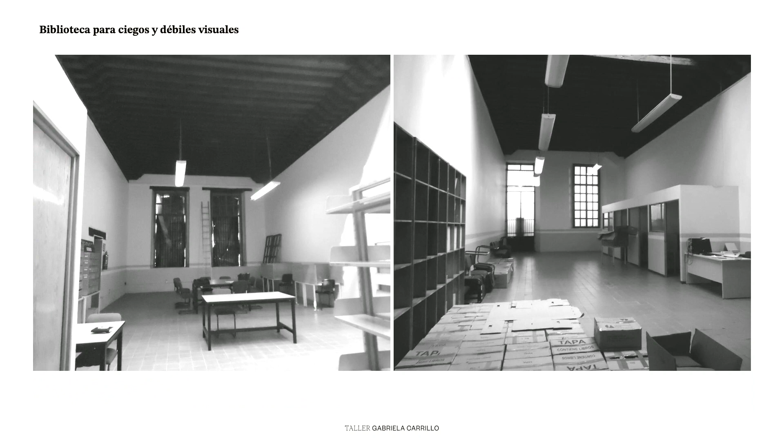I don't know in your case, but in mine, I never had in my mind the idea to design for people that can see. And that was really tough, to start to see that I used to design for myself. I used to see always from my point of view. So at this point, I visited the place. The library was already there. The building was an old one. It had many phases along the years of this building. Very beautiful.

The size of these spaces, the height, wooden beams. I love to be respectful with the memory, but in this case, the library for blind people was like that. The program they asked for us was very similar.

Something that started with thinking: okay, I need to start recognizing otherness. And that changed, I think, my whole life, because suddenly I wanted to start asking what happens with the rest of the senses.

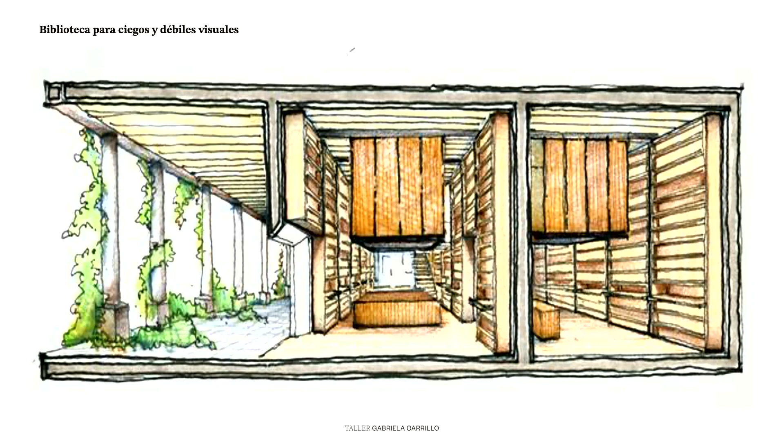With smell, with the aromas, with the echoes, with the sound. So the strategy was to create a vestibule that was an aromas garden, which we designed with an artist. Then we created two boxes that move around the sound and the echoes. That garden was a composition itself, having to do with the aromas of rosemary or lemon, and it was a provocation for people to get inside.

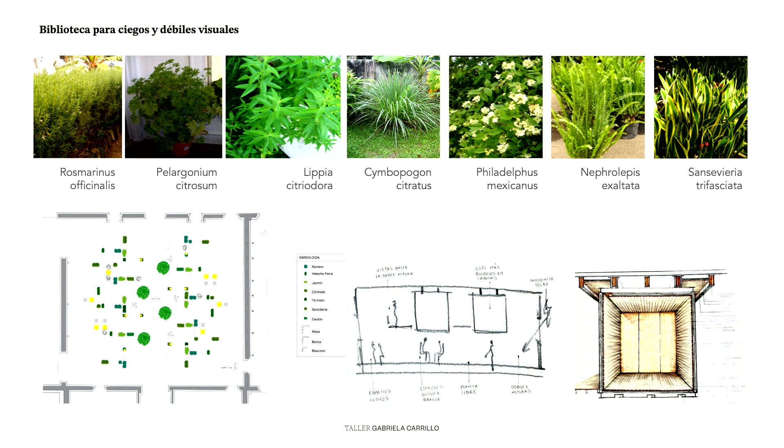Then we started to think about the echoes and how space can create this impact. We usually forget it, and it's ridiculous. So for us, the provocation of creating these echoes and silence at the same time was a big opportunity.

We wanted — in Mexico there are a lot of seeing impaired because of illnesses, since people don't have money to treat them. So they start to lose their vision, and yellow is the best color to be seen.

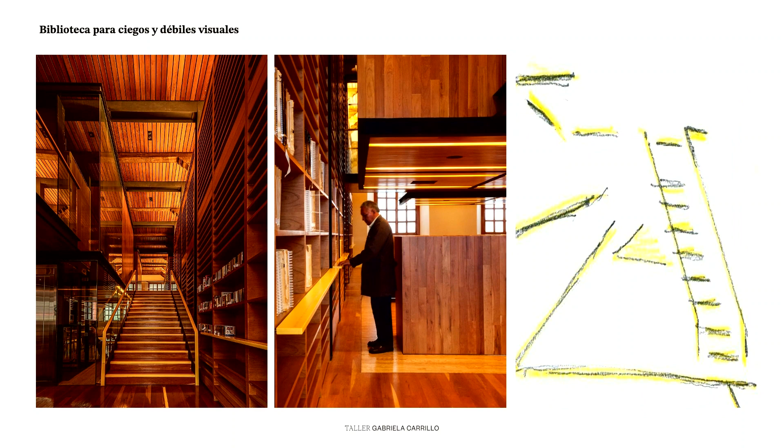So then yellow became an echo in the lights, in the lines, in the handrails, but also we wanted it to work as an acoustical box of wood, with different tones of wood, to help find out the space where you were. We worked all the time with sounds.

And we found out that the program should create a futurist library that thinks in a space where sounds could be achieved. So it was the first time I designed a plan with echoes and sounds.

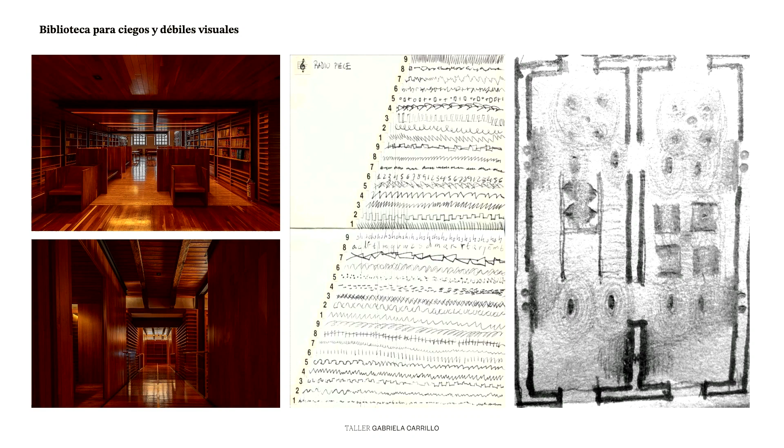It's a soundscape where speakers — mono speakers, general speakers — happen in this. We wanted to create a clear space, just with volumes floating, that could wrap all the sounds in one space.

We found out that the library for blind people is very noisy. There are kids. In Mexico, blind people unfortunately are a group not well recognized. Imagine kids who are blind.

So this gave me the opportunity to ask myself more questions in the future, to find out that I want to design from another point of view, to feel uncomfortable all the time because of the things I found out in terms of gender, in terms of social conditions.

And at the end, we managed to create, in this case, soundscapes — there are art pieces, sound art pieces happening in the library. The furniture was designed especially for that. And it's, at the end, a labyrinth of sounds in a very clear space, floating there.

The second project has to do with some judicial courts. For me, it was a great opportunity to start working with — asking myself what justice means, and if we as architects could do something with that.

So we were hired by the municipality in Michoacán. This town is a very complex town in terms of violence — the worst drug dealing guys are there, and these were the judicial courts.

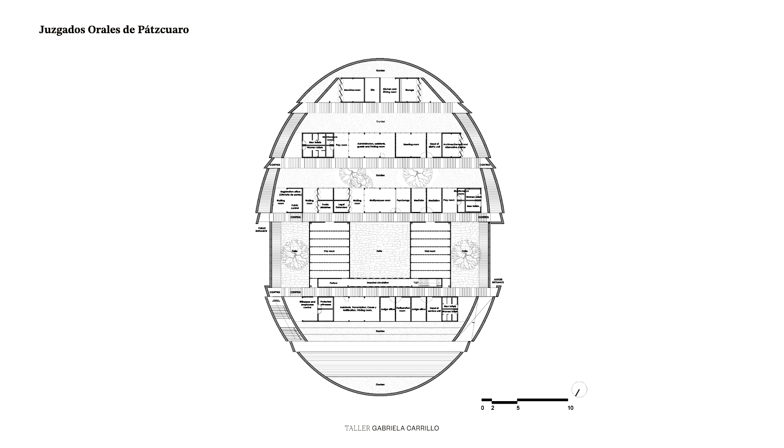The first question was: can architecture provoke liberty? Is there any opportunity that all the different floors can happen in a very free way? Because all of them are filled with bars, even though these are not spaces like prisons — it's like an earlier stage. So the whole composition of the space has to do with an echo to the context.

At the same time, taking advantage of the labor work that we had with stone — this is a public building, and it's ridiculous, but in that place there are the best workers to do this stone work. And then we took advantage of the topography just to create the jails area with a higher wall, and then the other ones more clear.

And then again, ask ourselves: how can democracy be expressed? At the beginning, a lot of people thought this was like some kind of museum. In their minds, this wasn't significant as a judicial court building. And for us, the idea of keeping this transparency was important.

When I started to move around all the judicial courts in the country, the format was traditional - everything written, there's never someone facing the other. And it was ridiculous to see the judge with a big office, even with a jacuzzi and a pole dance element in their own office.

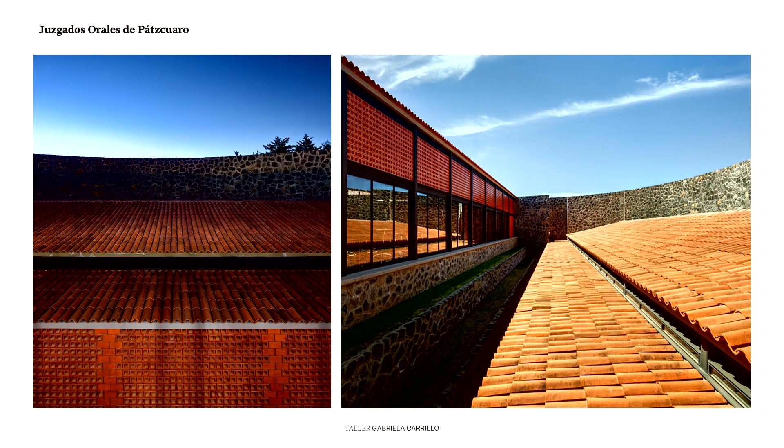And that's a big question: how architecture could create this transparency, could create topography, could create intimacy, and another opportunity to create a landscape as well. So at the end, we managed to take away all the bars to create an articulation.

I always say that the building is an articulation of a complex program, where judges, where guilty or not yet guilty people is, and where other people happens, and how with that light can be something that happens again with very local materials - in this case the brick - taking advantage of the voidness and taking advantage of the mass at the same time.

The next project has to do with time, because I've been working on this project almost 15 years. It's really crazy. It's a very big project, and it's very near here - an hour away from Tijuana in Ensenada.

Ensenada has become a great place for drinking wine. I hope you have been there - great restaurants, great food, great wine.

So this place is a huge spot. It is a territory of 800 acres. It is very beautiful because the vineyards are beside the amazing mountains and the sea. And what they asked us to start working on was a winery.

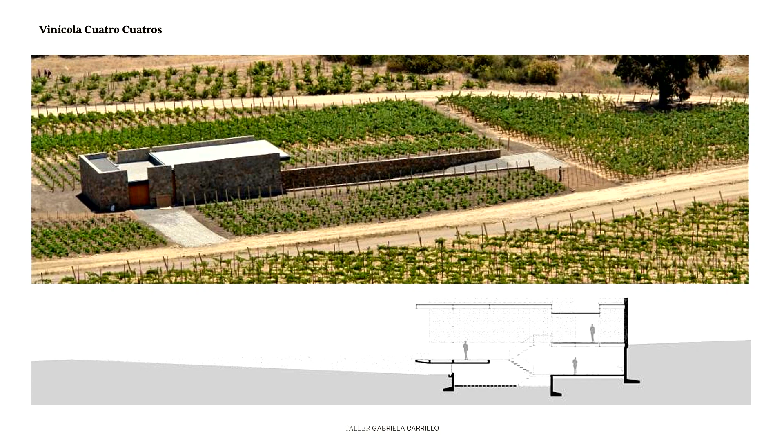And then a lot of things started to happen because this winery was really small in the middle of all these vineyards. And the idea was how we can create a dialogue with the landscape, because we didn't want to do anything - we wanted to dissolve ourselves, to disappear the program, the scale of the building.

And then again, taking advantage of what we had learned, we created a topography that took advantage of some olive trees that were there. We understood the climate. And this is very particular - in Mexico we had a whole diversity of climates, as you have here in the United States.

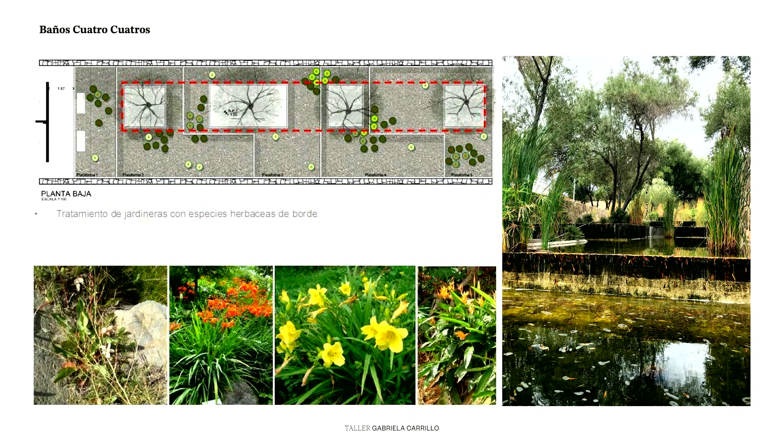And in this case, we found this very desertic climate, and we wanted to create a different kind of atmosphere, a different kind of pool, a place to enjoy, a place that could bring birds and frogs. So we added this pool program to a bathroom program.

These were some bathrooms because the Vinícola became a place for parties, for weddings. It's a multi-purpose building now. And then they needed bathrooms, restrooms, you know.

So what we created was this pavilion, taking advantage again of the stone, of the wood, and trying to dissolve again the different levels, the topography, and the facade to become a water garden.

And always the question when we develop hotels is to ask: how do we live? How do we inhabit? What do we accept? What is the connection? Where's the luxuries?

And in this case, to think this idea of - for me, this is, I mean, you have in this territory the most amazing sky, maybe not here because of the lights of the city, but it's the same territory and the stars, and without this rain happening - in Mexico, we have rain nine months every... well, it rains often.

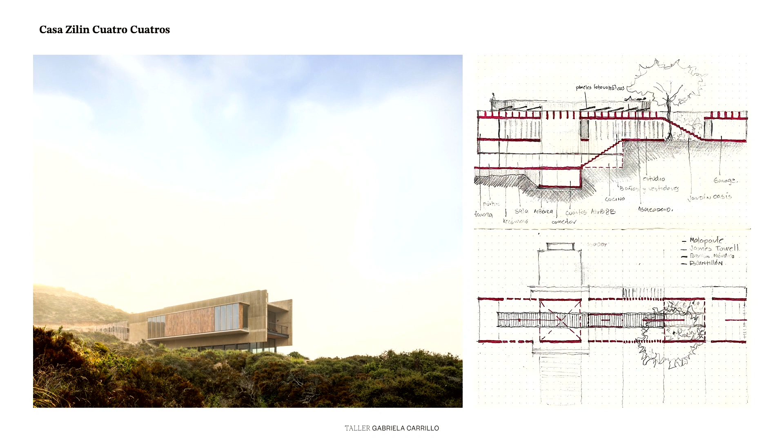And there I had the opportunity, as I mentioned, to keep working. So I had developed a house, which is, at the same time, where there's a beautiful fog happening in this place. And this knowledge had happened over time - understanding that the wind becomes an enemy, like knives in your face, that the fog happens every morning, that the wind is terrible.

So being beside a mountain, it's healthy - you can take advantage of the topography to create an experience of how the light moves around.

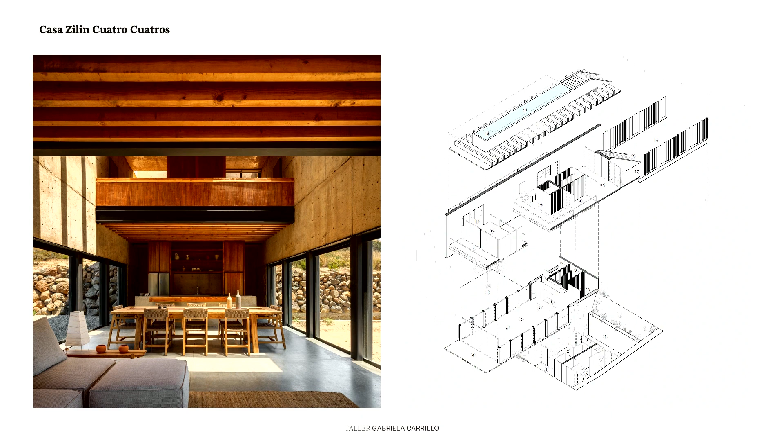This also makes me understand a bit the scale of things. I had never worked in a territory this big. So how to place elements and create this connection with the sun and the stars and with all the materials - in this case, the stones going underground, stopping the wind, and taking advantage of this amazing and very respectful landscape. I think the idea to dissolve the architecture and consider the complexity for this landscape to grow in these desertic conditions was one of the main issues for me to understand.

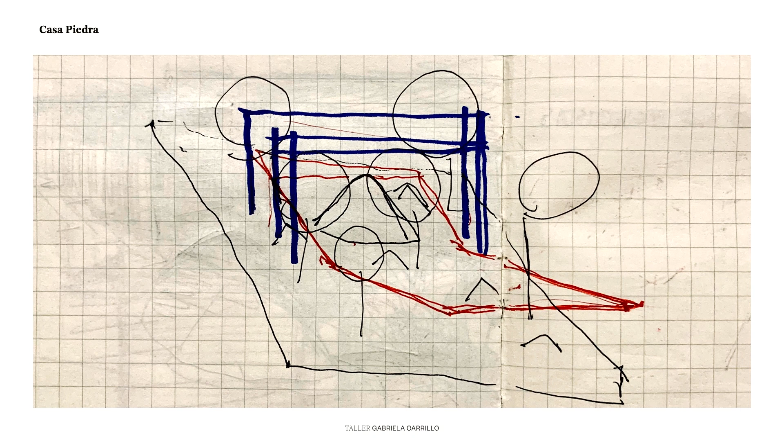Taking advantage of the presentation and talking about stones, this is a house I designed for my father and my brother. My father has been living in Acapulco for 25 years. Acapulco is one of the most beautiful spots, with beautiful bays, and it was really famous. Today we had a big hurricane that destroyed all of Acapulco, so there's a lot to be done in the future in that town.

What happened is my father bought a plot here which had a big rock in the middle. Then I discovered it had two rocks. My father is a geologist, and he wanted a very traditional house, like a very urban house - which is something that happens with beach houses. People want to replicate the urban house they have, with glass, all with air conditioning. And this spot is really hot - I need to say Acapulco is really hot.

But for me, it's exciting to have the opportunity to grab that stone - and not only that, because all the land was filled with stones. So my first question was - this is my family, and I want to provoke and ask myself, in terms of social issues, in terms of these patriarchal conditions where there's a main room, a boys' room, a girls' room, which I hate - I'm against that. They wanted a big house, all filled with air conditioning.

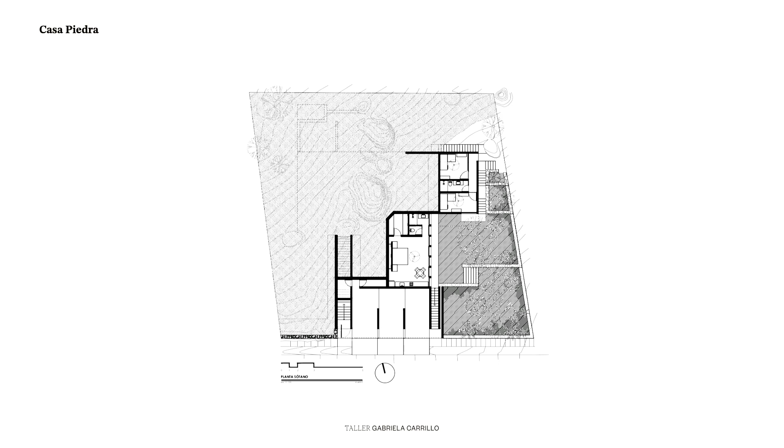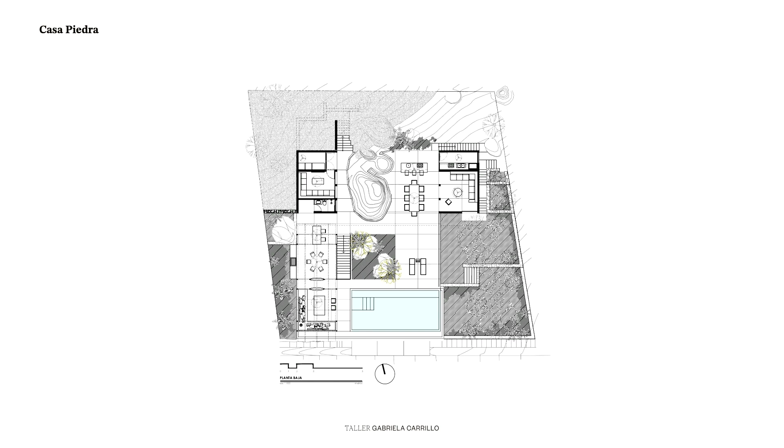The topography was really tough, so I wanted to take advantage of all the different levels I could grab. I wanted to disappear the house, so I imagined the topography becomes a big plaza, and find the level where the wind blows, where the infinity view of the pool happens with the sea, and where the stone grows - was the same level. I needed to walk this plot a lot.

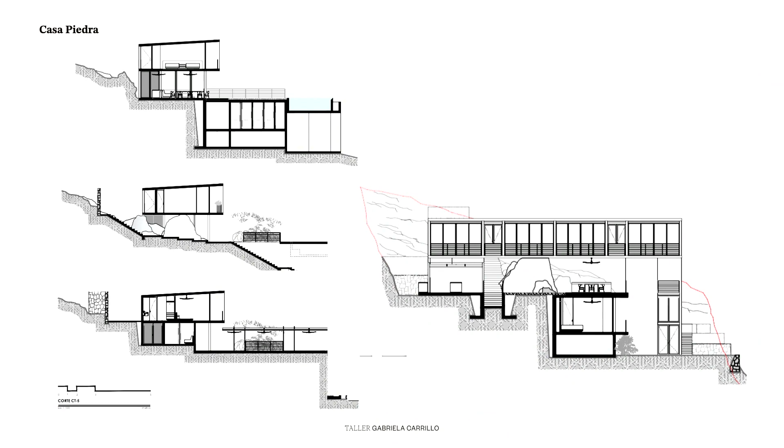And then the other thing was they wanted 4 rooms. So I wanted a portico that could be open back and forth so wind could cross and air conditioning wasn't needed - of course, it needs to happen sometimes. And I wanted also the color of the sand of Acapulco. So I took advantage of one material, trying to scale the house at different levels, taking advantage of the topography, creating that infinite view.

Then ask myself - I want to create something nowadays with all this climate change, all these environmental issues - how to achieve a minimum act that could connect intention, just framing and understanding these main characters, which were the stones for me. And of course, taking advantage of a geologist owner who could accept having this stone left there.

And then managing a bit, taking advantage that I knew my brother was going to pay, I said: if you put glass here you'll need air conditioning, and it's going to be very expensive, so we shouldn't do it. So at the end, the house has just the purpose to create a frame.

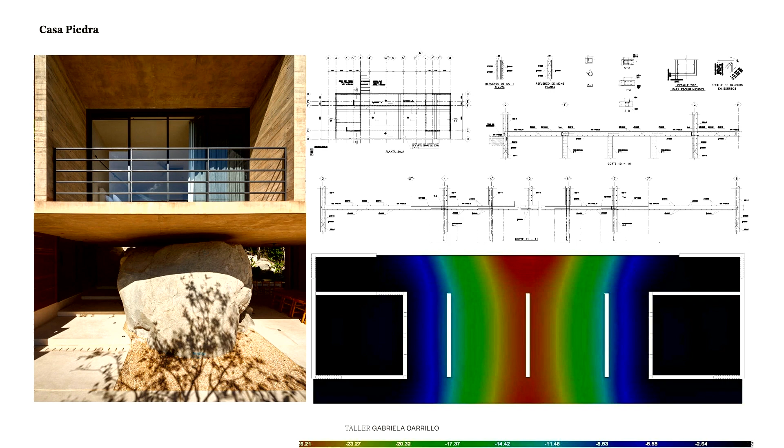That's where I put a lot of energy - how to create that clearance with a very nice slab of concrete, without any beams, without any columns, working with a structural engineer just to understand that the whole building is a big beam, and the division walls from the rooms could become that beam. So the structure became minimal, and the house could float, creating this tension between the organic world of the stones and these perfect, orthogonal lines.

Then crisis happens, and crisis is an important input when you live in a country like mine - we have crises everywhere. We had the big two earthquakes in 2017. A lot of you had done programs here with Carlos Cedillo - he was one of the big leaders in terms of the reconstruction programs we got, because of our relationship with the Secretary of Culture in the area of Morelos, which was the place where the earthquake happened.

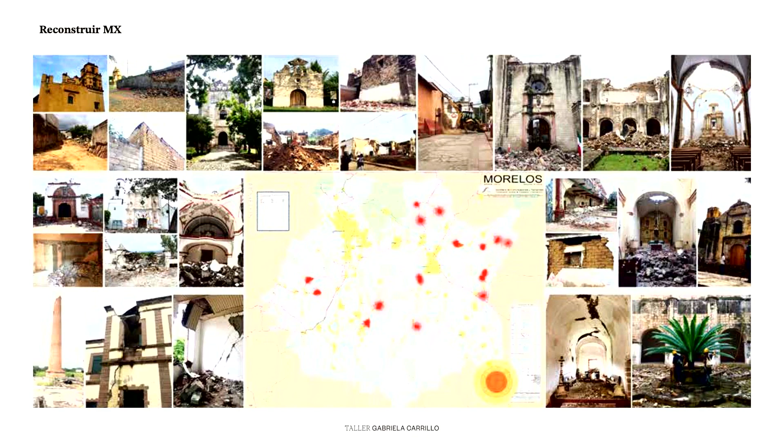All the spots were small towns, very old traditional towns that were damaged because of the earthquake. And I was really involved. I have a kid, an 8-year-old kid. At that point he was like 2 years old. I wanted to ask myself, what should we do as architects? So I wanted to protect the patrimony, which was ridiculous, 80 houses in a town, very beautiful earth-walled houses with big heights.

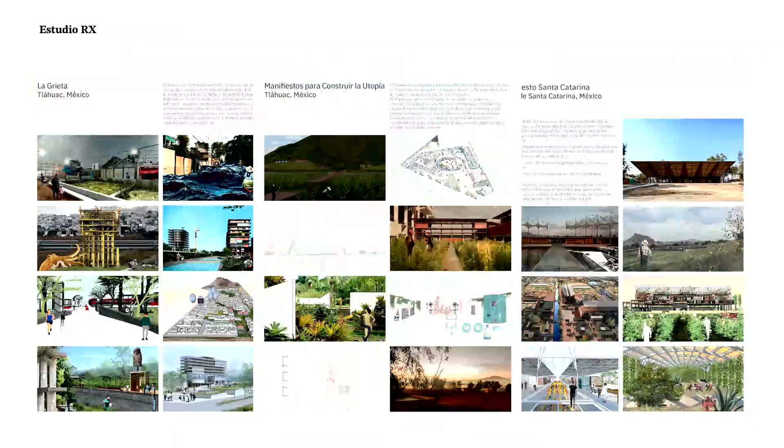And I created, as a teacher in UNAM, as a professor, I created programs, social programs with my students to bring people building with the earth and to work with them. Unfortunately, that program was a failure, I need to say. And failures are opportunities, as I mentioned, because the result is that I didn't get to finish a good project with the community. I was really sad.

I wanted to not do architecture anymore, and what happened is suddenly I didn't want to teach anymore because I thought we have enough energy, you know. We have 7,000 students here and a lot of families, so every student can adopt a family, help them and do work, but that didn't happen.

So then I developed a program which is Estudio RX, this research program seminar that I have with Loreta Castro at UNAM. And the idea is that we as architects can't work with crisis in an emergency, because the emergency is the food, is security, is health. But space needs time. So we started to find out crises, and we found out that cracks were an issue.

And because of the typology of the land where our city is based, we have a lot of problems. Now we're working on migration, which we believe is the biggest phenomenon that we are facing as a world in terms of social and anthropological issues. But well, in this case, we decided to work with cracks.

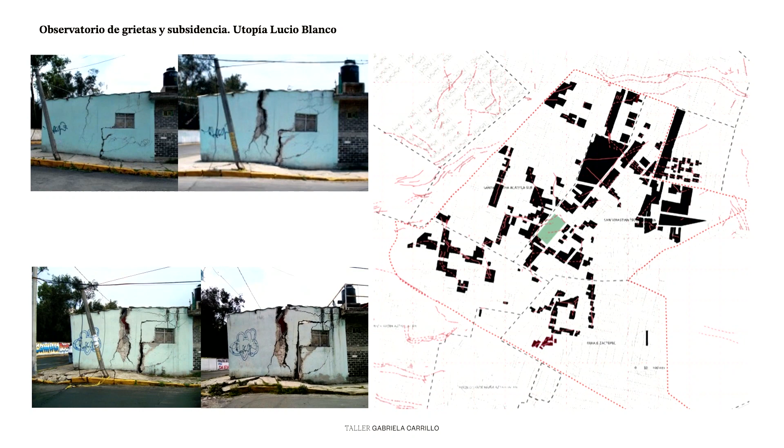Specifically around the lakes, the cracks happen, and there's no coincidence. We had found out that physical cracks are reflected in social cracks, where violence happens, where complex issues in social terms happen. So we started to work in this territory that we found was filled with cracks, and this house had fallen without any earthquake in between. All the black plots on the map were what we call red codes.

So there are spots where no one should build, and everything had happened in informality. We managed to have a relationship with a municipality, a local municipality. This specifically, this municipality has 2 million people. It's the densest area in the city and the poorest as well. So we got a school with 2 cracks happening. We got a lot of rubble, because rubble is like the local material in Iztapalapa, a very strange territory to work in.

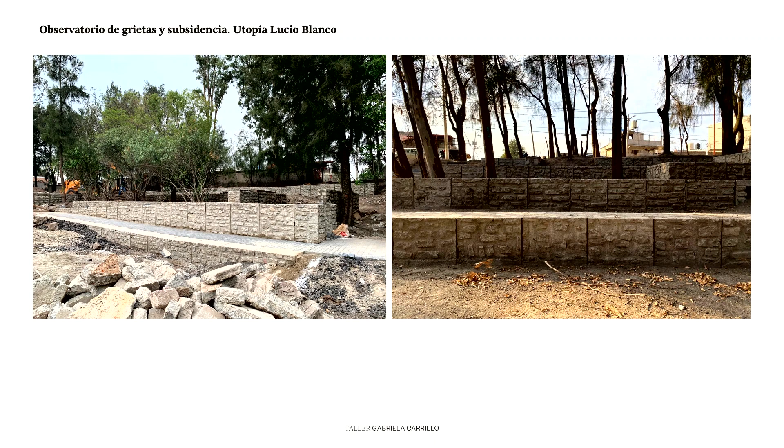So we started to create some lines and to rule the topography with the same rubble, and to create a new topography that could manage different programs like gardening, an outside gym, a playground area, a cultural forum.

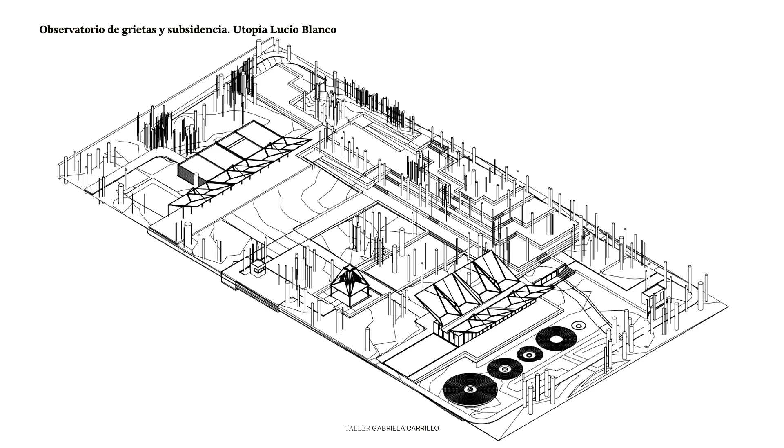So at the end we designed, we worked with the community, with the students. It was a big work asking what they want. They wanted a kiosk, they wanted a place for alcoholism discussion, for violence. It is a very complex site. There are no public spaces here, and the garden became a possible connection for the neighborhood.

And there was also an opportunity to work with a very specific doctor, a geologist, a doctor that studied the cracks.

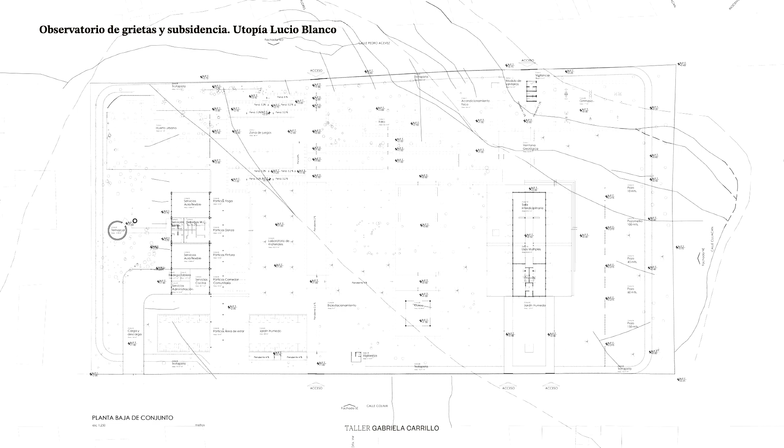And you see all the cracks happening on the territory. So those were the rules where we composed a garden, again, an intelligent garden that considers what type of vegetation. We're really responsible with the type of vegetation that happens. We're very careful nowadays of what is being built, but we ignore the type of landscape we're placing.

And what happens in Iztapalapa is that everyone wants grass. And grass is a big irresponsibility. It needs a lot of water. It needs someone taking care of it. The natural landscape is magueyes, gravel, volcanic stone.

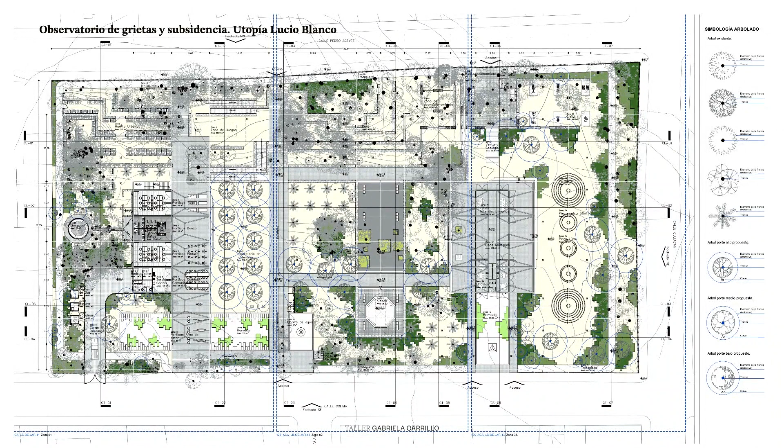So at the end, we created with this doctor an observatory. It's an observatory to talk about subsidence and cracks, because cracks and subsidence are connected. Today we have earthquakes almost every day, and this is because we're draining water from the subsoil. Subsidence is happening because of all these different layers of geology, very different geology.

This has become really violent somehow. So we wanted to explain with a very small, minimum economical building, a kind of machine that could move with the movements of the earth, with the cracks where they are, and create a space of knowledge.

And then we design a garden of benches and of wells - more like wells. The idea is to keep doing these wells for research purposes, so people could find out that this is a garden, another type of garden where these wells are happening this way, and that's beauty as well. But more than beauty, it's intelligence and knowledge of where the houses are.

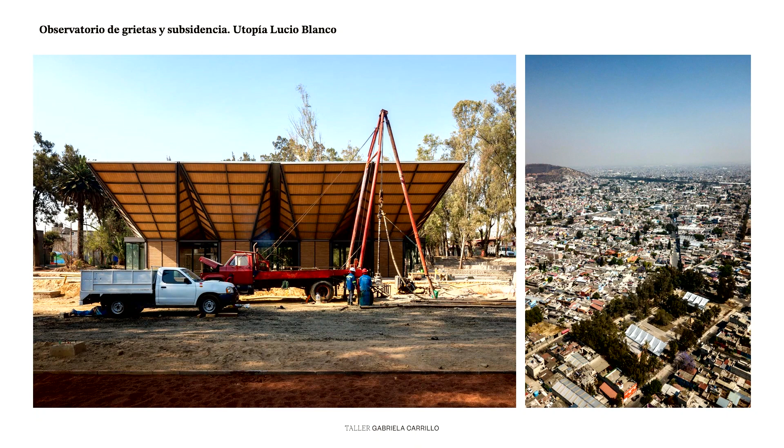In this site, everything is auto-constructed - everyone is building their own foundations. And for us, it was really important to share that.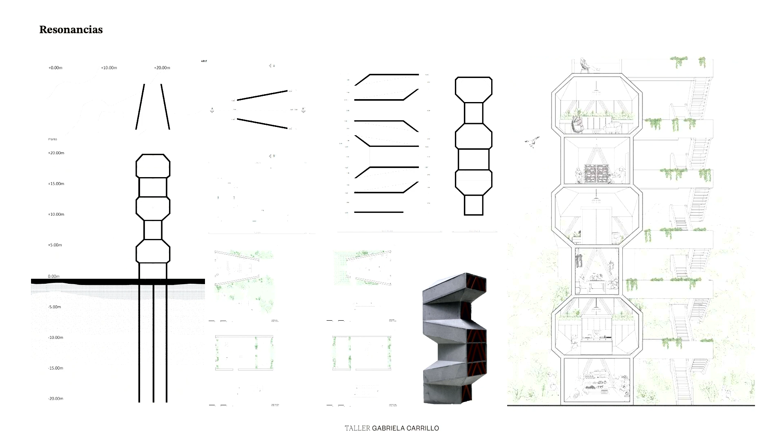So I developed a research, and what happens is that the rules in Mexico make all the structures become bigger, wider, heavier. For me it was just like asking myself, in this program where I got this scholarship, how geometry could become intelligent and done in civil work, and the rest should be prefab. Imagine, we don't have these sophisticated prefab systems - everything is very locally produced.

And then another friend who has worked with communities for a long time during the earthquakes. So at the end, what happened is that in 3 years we had developed 35 projects, built and designed.

In that time, the first proposal was to develop a market. It was not built in 3 months, but it was built in 4, with a budget of more or less $600 per square meter, to develop important different typologies in very different contexts and conditions.

So at the end, we always say we design a strategy. The strategy starts with the group and with the knowledge of the different leaders of the team. Then we design a section that understands the big programs - like multiple purpose rooms, courts, community places to have food - and then the small ones that have restrooms, small workshops.

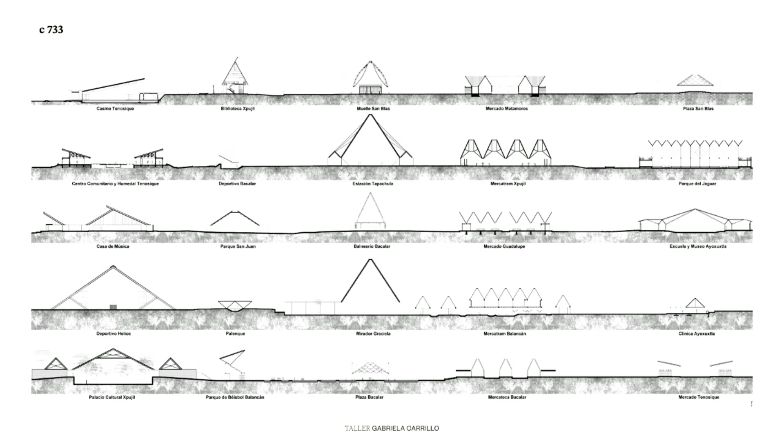We also wanted to design very light structures because of the budget, and to be very intelligent in terms of the geometry again. So triangles are not the goal, and the shape is not the goal - for us it's like common sense. It's the way we account for the sun, the rain. It's the way we take advantage to deal with the conditions of earthquakes or hurricanes.

And well, we started with the competition for the market, and we were inspired - the market is in Matamoros. It's a very horrible area, I need to say - it's like a desert. The plot where we were working was filled with needles, I think, for drugs. There's no public space at all.

And our thoughts were inspired by the traditional Northeast architecture, which was really protecting from the sun, which is very tough. We also wanted our program to harvest, to take advantage. The name of the Colectivo was the code that we placed in the competition.

And we were discussing for these 2 weeks how public architecture should be, because in Mexico we haven't had public architecture for the last 70 years. It's because they pay the constructors to build wherever they want - they don't care about design. So there haven't existed just the big projects.

So in these communities, markets are just like a simple cover made of steel - they don't care about anything. So we thought we'd read from Eladio Dieste, a beautiful phrase that said public architecture should be economical, efficient, logical, but always cosmic. And for us, the cosmic has to do with understanding where you are, like creating this echo and this resonance with the topography, with the climate, with the vegetation, with the wind.

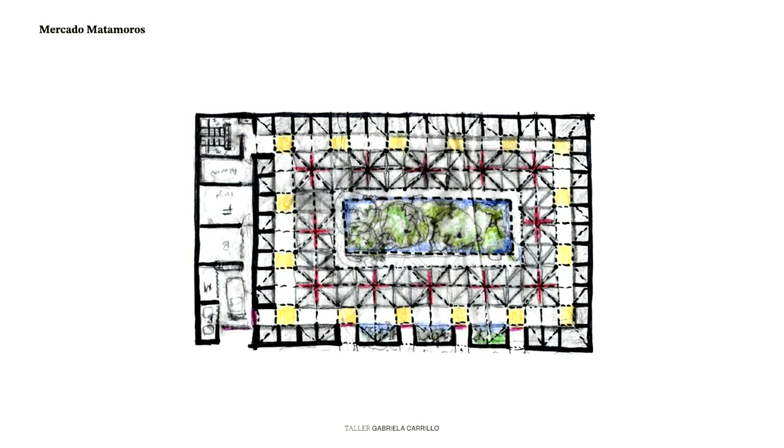And in this case, we wanted to create a protective structure which was done in civil work, and then the prefab, which were these umbrellas in the center, like creating a patio and a portico around an oasis. Of course, that oasis needed to harvest water so we can make it happen and place it with local vegetation.

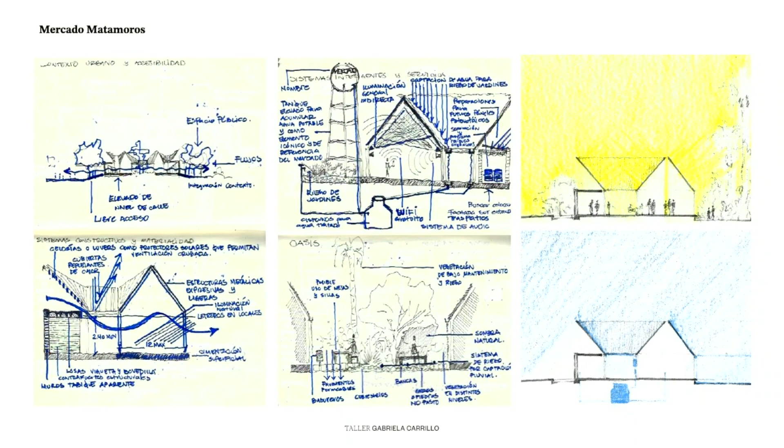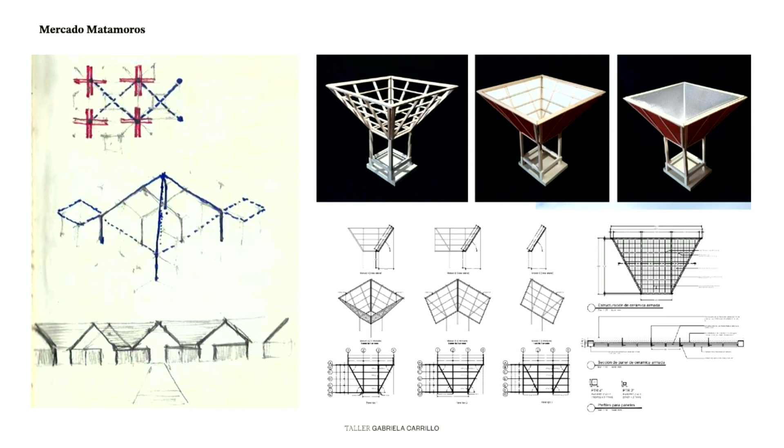So we designed the patios. We were designing the schemes in plan, of course. We were designing environmental strategies for things to happen, like harvest water, without any air conditioning, let the light happen. And then the structural issue, how we were considering, designing, understanding the weight of each umbrella and of each plane, so they could transport these elements to the place already built.

And at the end, this was our proposal. We said, we don't want to reproduce this market, so we're leaving you a strategy. You can change the materials.

We use different layers. In Matamoros, we have production of bricks. So our layer of brick is acoustical, thermical, important for the quality of space. Then we have the steel, which is easy to harvest water and move it clean and send it to the gardens. Then the material has to do with the local condition.

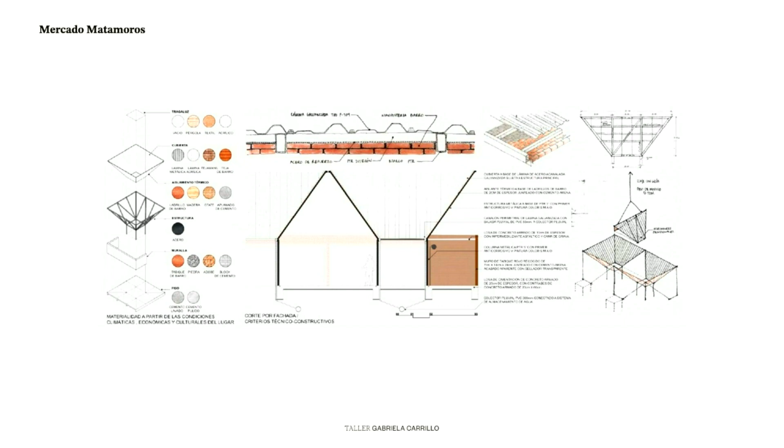Then the walls has to do with the program, and then the prefab element could be a very simple steel geometrical structure that happens, that maybe on its own is very subtle and very thin, but once it gets attached, it becomes a system. And then, of course, in our mind, this should happen all in brick.

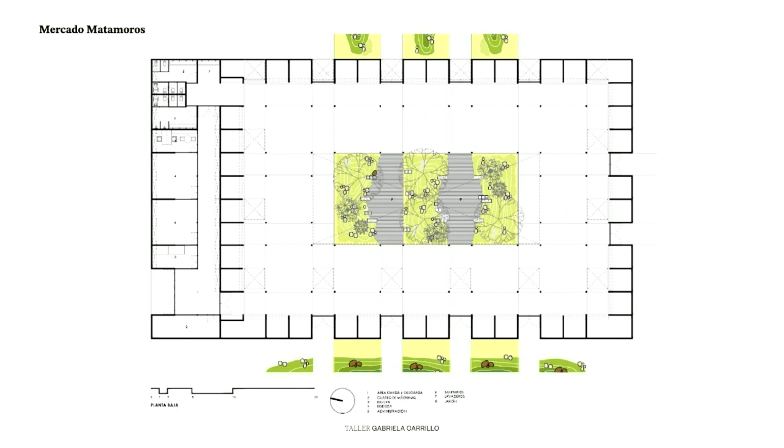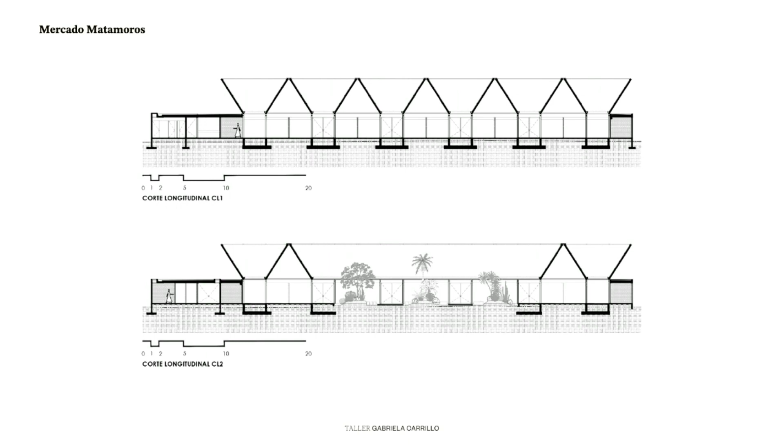And one important idea in this also was to recognize something that happens in my country, which is informality. If you see my streets, if you see everywhere, people go, open their things, they sell everything. There is life.

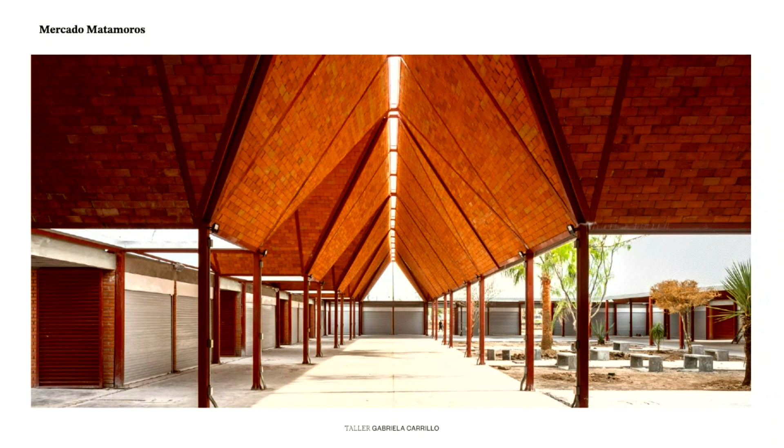So we wanted to create paths everywhere. We wanted the garden to be a place to cross through the neighborhood. And then this flexible space could become anything, because there's anything here. So this place could become a place for classes at night, or a community center, and also, of course, a center for shopping, your groceries, and of course, how to get the light in and these basic elements to happen.

Some months later, with the pandemic, they said, we want you to replicate your market, but now in the southern border. And we were, of course, thinking we are not going to replicate it, but we are going to follow the system that we had created.

And that system, we already understood the scale of these elements. We took off the voids, because in this case, rain happens all the time. We create an opportunity to harvest water and to flood it to water gardens. And then we changed the material.

We found a local production community of bamboo. And then we decided to create this veil inside of bamboo, and then the garden became a path and a garden, outside garden, for informality to happen. We used the brick as well, and in this case, the market became a connectivity between one neighborhood and the other.

Then what happened, they asked us to change the scale. And this was a great opportunity, because the market was really small, no more than 2,000 square meters. But in this case, they say, okay, this is a whole neighborhood, this is a whole block, and different sportive activities happen. We want a baseball field, we want some football courts, flexible courts, and we want another space.

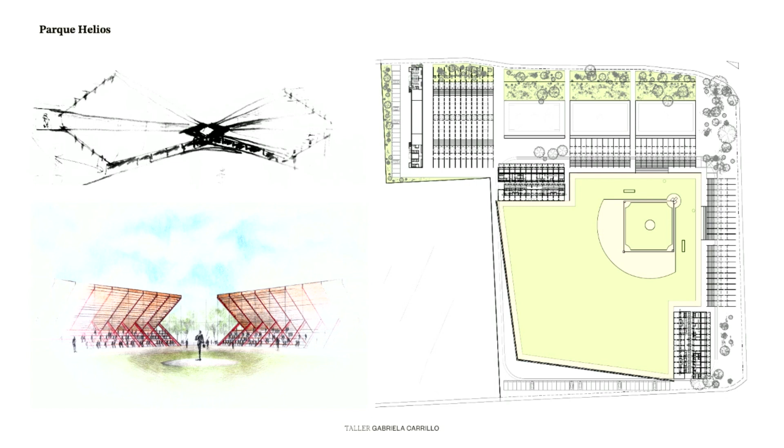So this was an opportunity to ask ourselves how, doing architecture, we could be doing politics somehow. And at this point, we created this scenario where we said we want to do a lot of things at the same time.

We wanted to create, not to have a fence, but create a topography. That's very pre-Hispanic, and very inexpensive. You can move earth easily. We want to do everything with one act. And we want to use brick as well because, at the end, it's timeless.

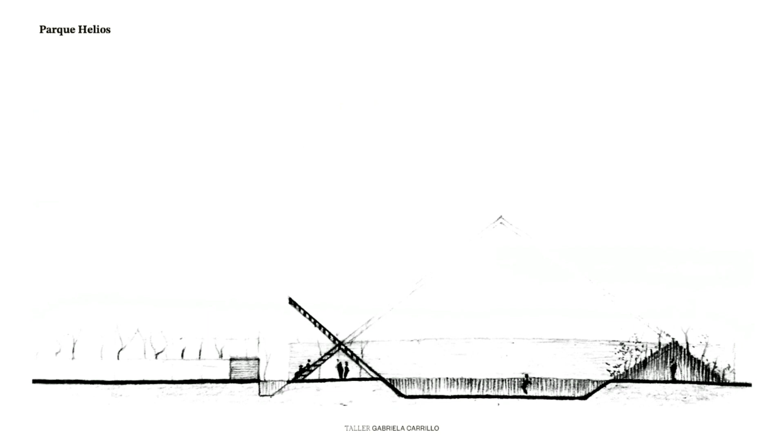So that action was about how we can produce a baseball field, put people to see it, rather than have this big wall, however many meters long, which is violent because nothing's happening there—there's no life in the cities. In my country, life is important for violence not to happen. For us, it's about how to create this transparency.

So it became a fence, it became a bench, it became a portico, because there are no trees growing there. The portico was healthy for the sun and for people to walk around. And then to enlarge this, we could get a place for boxing and a gym they wanted. So we managed to create that kind of strategy—a transparent fence.

Again, our client was happy—the federal government. The local government was very unhappy. They wanted fences everywhere. For us, it was like a manifesto to say, okay, the main places are free. The benches are a portico to walk under the sun. This is a new opportunity to imagine how architecture can change a bit of these social issues we are living, unfortunately.

Something similar on a bigger scale happened in the south, in Tapachula, one of the most troubled migration areas today. Like all the plazas, public spaces are filled with migrants. They use the plazas as restrooms, to clean their clothes, to wash themselves. It's a big issue in my country, because the border was reinforced in the south.

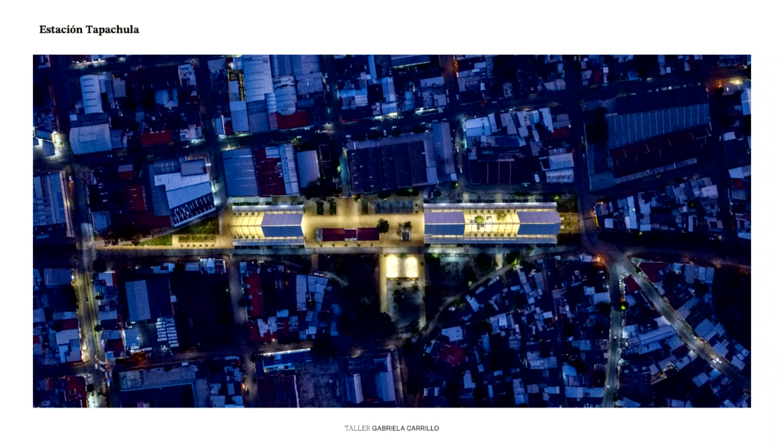We wanted to ask how our space, which was going to be a community center, could receive these people. This was a train station. When we got it, it was completely abandoned—a garbage area, a drug dealing area. I was very happy to see again SCI-Arc, because it's so amazing—this long building, I remember it a lot. So this project was again an articulation of the strategy of the section, the lightness of the structure.

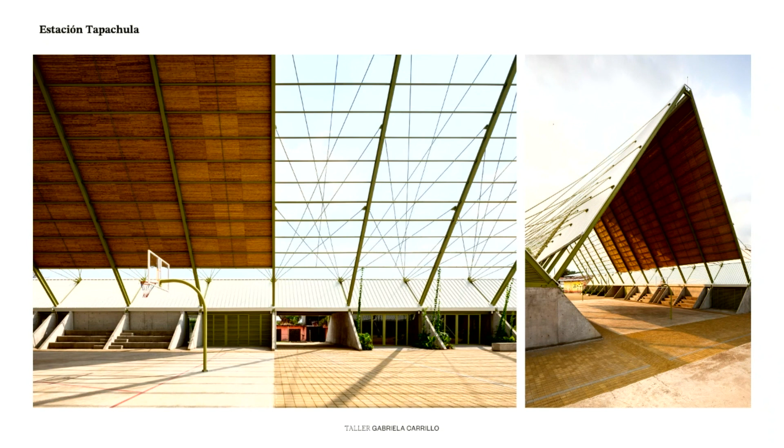Taking advantage of bamboo, in this case rain happens, so we believed we don't have money to cover all this space, but if we just place vegetation it can grow, and we will have a big portico of vegetation in the future.

Then there's time—this land is Tabasco. Tabasco is under sea level. What happens is that in 20 years—we took a look at these programs that project the future of the land—it says it's going to be flooded.

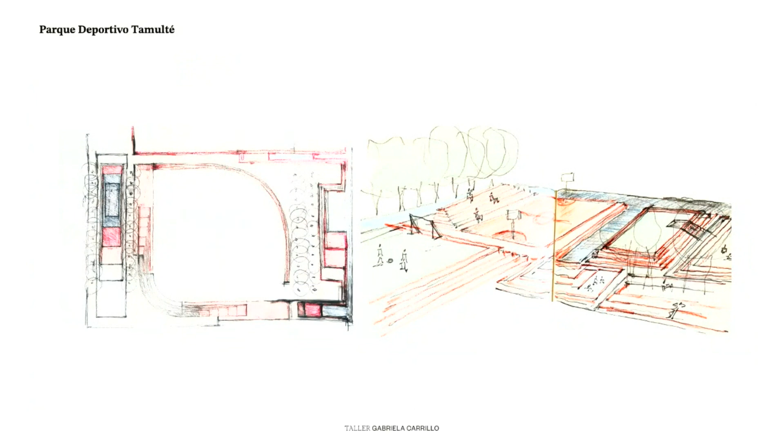That was the land, and what we did is just move the land. We believe—I was just reading a very beautiful phrase that said the wisest civilizations do things that maybe not even their grandsons will see. And we are always anxious to see our results.

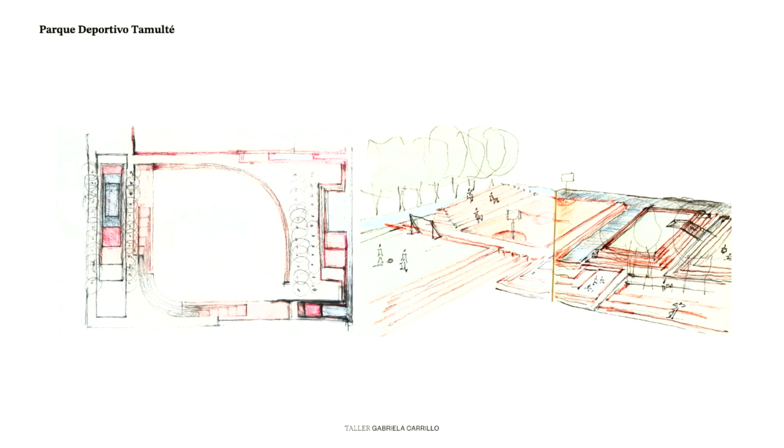So in this case, our energy was just placed in creating a topography, in planting a lot of trees that now are thin, poor trees, but will give shadow maybe in 20 or 25 years—taking advantage again of the clay and moving the earth.

With that topography, we believe that in the future water will run, but the football field will be like an island, and maybe the same will happen with the baseball field, and maybe the playground will be something like slopes and fields between water and topography.

In that same land, we did a house of music, and it was very beautiful to work with a teacher. It was a house of music for kids—very small budgets for these houses to happen, because there's no money, the government is paying for this. And we had the river.

What happened in my country is that every town that faces a river closed a big wall, like a backyard, like the back of the house. They threw everything there, it's polluted. So we said, we're going to see the river.

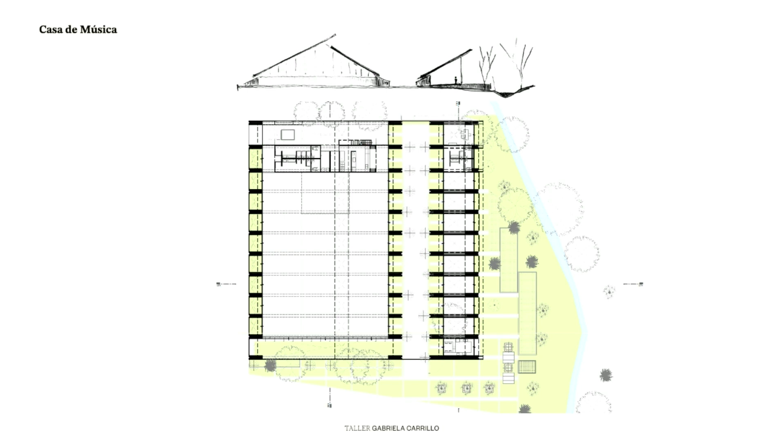We created this very simple scheme of eight axes that face the river, with three slanted ceilings, a strategy to create consciousness about water. We harvest the water, repurpose it, clean it with wetlands, and send it to the river clean. Everything was done with brick in different conditions, in the ceiling, the lattices, the floors. We wanted to work with light.

We wanted to work with acoustical elements, with local coconut wood to achieve acoustics, creating small rooms for particular classrooms of different instruments, and then this big hall, which is also for parties and festivities. We wanted to break the limits — it's ridiculous that public architecture has fences all the time. So we wanted to break that limit of the plot and create a street going inside, so you don't understand where something starts or ends.

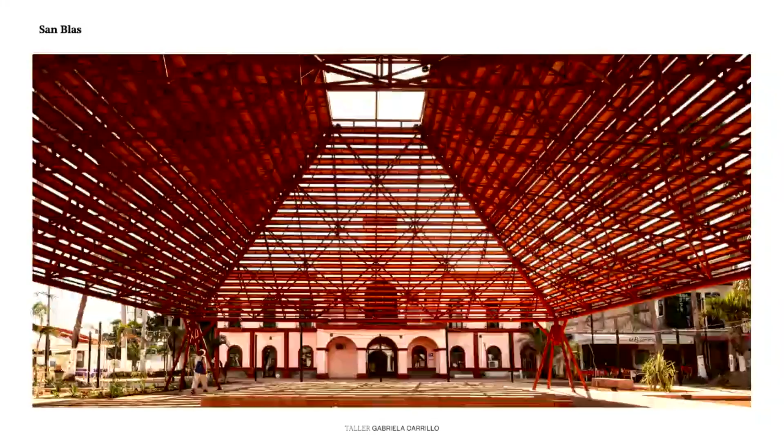There's a beautiful music tradition behind this, and memory is a big theme in my country. Memory has to do with the eyes of the god, as they say, which are these huicholes figures, very beautiful, like creating a kiosk in the middle of the plaza, or the old aduana — the place where they used to burn merchandise that couldn't go into the town. That memory wanted to be kept somehow in these interventions.

This changed to become a cultural center, and the trees, the voidness, the patios — that's important for us. We don't have enough money to build a lot, but we have the power of voidness as a big condition, and this voidness could become a forum, a place to do workshops. We wanted to take advantage of this old brick that is still produced there, and wrap this cultural program in a very flexible condition.

In the same site, but some meters away, we remembered that the landscape had to do with these old buildings, but also with old ships, because this was an important and very used dock area. So we created...

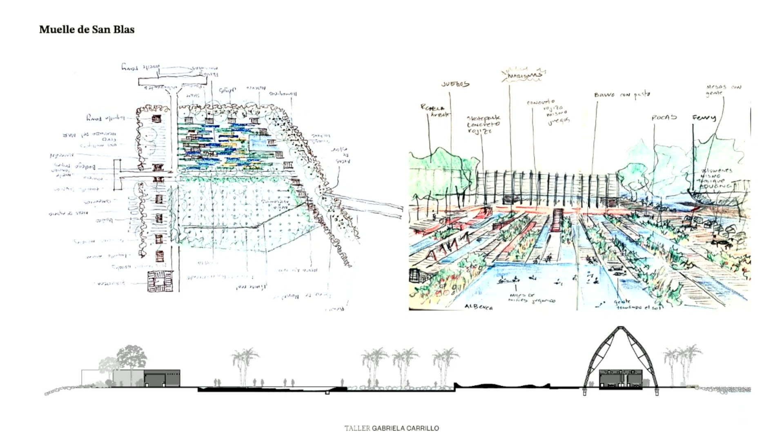Again, taking the opportunity to think that architecture is a chance to rethink our practices, the way we want to imagine things. We didn't want to bring a generic game. What happens today is you buy this very expensive playground for kids and place it everywhere, as if all the land is the same.

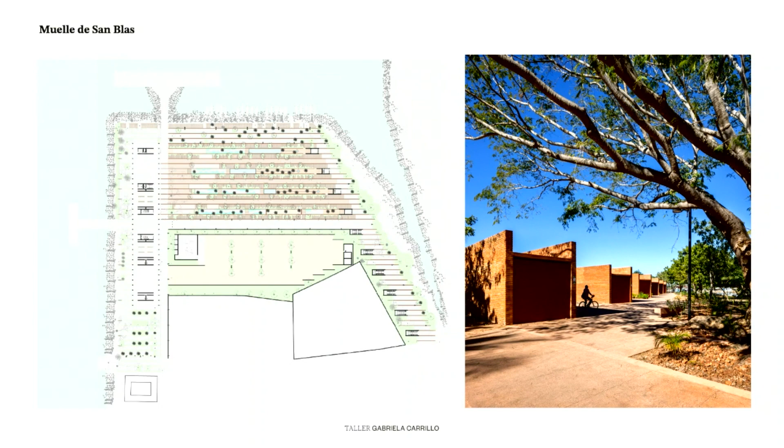In this case, we wanted to create something that has to do with ships. We wanted to incorporate water in a sensitive way — meaning not using a lot of water, considering evaporation, harvesting that water, creating pluviometers — spaces that are porous and fill with water when it rains, and look nice even without water when it doesn't.

They create this playground of floating waves, and then of course this shelter again for things to happen, like a court, but it's also a place to take ships or a ferry to an island.

Just to finish, this is the last project, and it has a big resonance for me today — it asks where our work starts and what architecture means in the 21st century. Take a look — this is one of the most amazing spots in Mexico, Laguna de Bacalar, the Lagoon of the Seven Colors.

It is one of the only spots in Mexico, along with Cuatro Ciénegas, that has these very ancient organisms alive, called estromatolitos. These estromatolitos are ancient figures — there are very few spots in the whole world with these creatures, these alive beings.

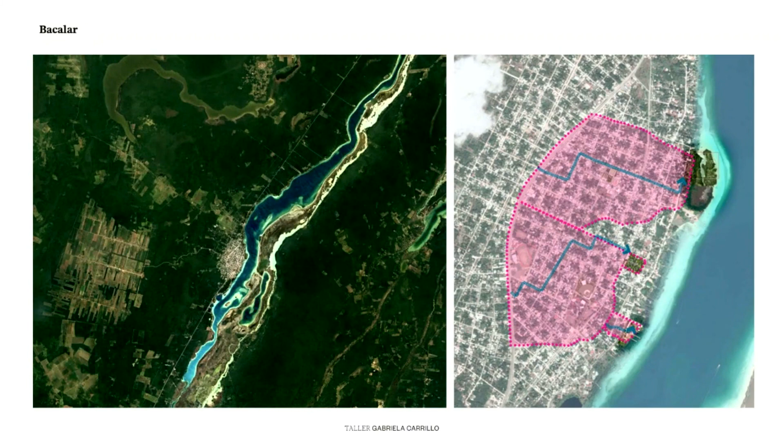And we took advantage of this important thing, which is to talk with others who are not architects, something we use to do a lot. And we got in contact with the most expert person on this lagoon, and she said, okay, this is a problem, there is no drainage, everything goes to the lagoon, this is a big problem.

So what we designed were drainages, public spaces that are gardens that contain all the garbage from the floods of polluted water going to the lagoon, with topographical elements, with wetlands, with different strategies that we worked on with a landscape designer as well, and with special people who know a lot about wetlands. And again, this idea of working with local materials, in this case the palm, and structures, very light structures.

And in particular, in this context, they say we want a community center. And we were really anxious, saying it's impossible to build anything here. Everything is a wetland, like mangrove, 70% of the plot is mangrove, then the lagoon, and nobody takes care of the mangrove because they are always paying attention to the lagoon. Of course, there's a big environmental issue here.

This became a very political project, working with social and political issues and authorities. Our strategy was: we're not going to do a community center, or we are. But the community center is going to be a dock, and that dock is going to be an observatory - an observatory for the mangrove, for the lagoon, and for the stars.

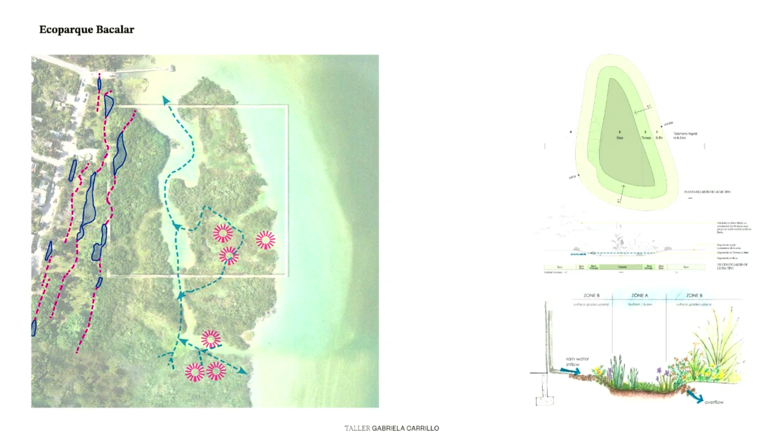So what we did is we created a landscape strategy to create these drainage ponds along that area. We wanted to recover the mangrove that was damaged. We invested a lot of money in one area. Unfortunately, we didn't get the money for the mangrove reconstruction, and there are political issues that don't let you reconstruct the mangrove that had been destroyed.

We created a strategy. We designed a structure that could be the lightest, where the column could become the foundation, the column, the beam - one single thing at the same time. So the design has to do with just common sense of structure.

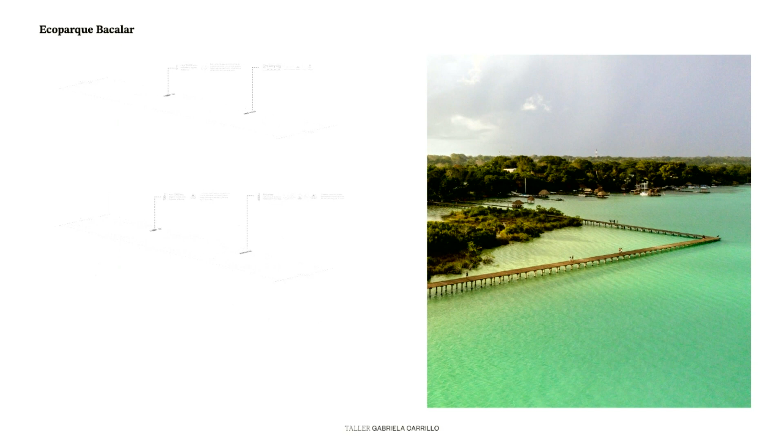It is local wood, Chico Zapote, and then it's just a plane that slants to get free from - to be near the lagoon or to get free of the mangrove. We couldn't touch any of the mangrove. So it goes from 80 centimeters from the lagoon up to 7 meters in height.

And the other part was to create a scenography, a museography, to tell people about the story of the lagoon. So we created a kind of live museum where people could go around - this is almost 1 kilometer, 800 meters, 200 meters each side - to discover and know a bit more of the story and create a kind of conscience behind it.

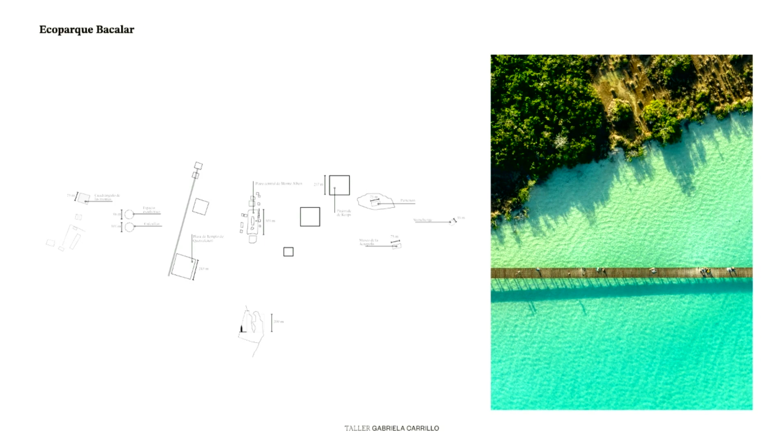And then the last element was, as in pre-Hispanic structures, to face the north. And facing north, what happens is it creates a tension between the water and the shadow, between this system of going up, and just because of the shadow you understand how slanted this element is.

At the same time, when I presented this project to my client, he laughed. He said, 'Oh, you're not doing the building I asked for.' And I said, 'It is.' But at the end, this building is 3 meters wide and has 200 meters per side.

When it gets up, it receives all the program that we need, like restrooms, the lab for the research program. We can make it fixed because it's 3 meters wide. At the same time, it's a democratization of the lagoon, because it's a public space where people can visit, take sun, and discover and learn a bit more about the environment. He laughed, but he accepted it in the end.

And just to end, I'll ask ourselves: where, and what, does architecture - or doing architecture - mean in this 21st century? Thank you.